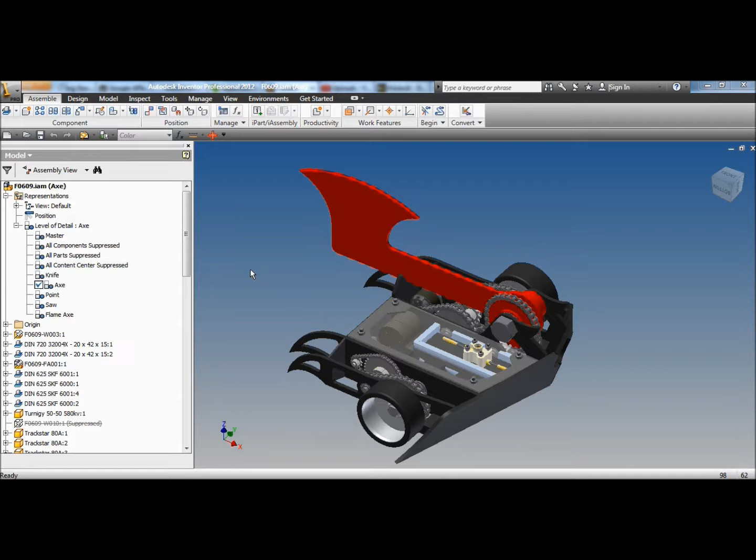I guess we'll start a new assembly. We'll put some drills in there. Where's my cordless drills kept? Yeah, there's a cordless drill. There's two cordless drills. I think we'll just do a two-wheeled robot. It's a bit simpler. We can make a four-wheeled robot later, but we'll do a two-wheeled one to begin with. We've got some cordless drills.

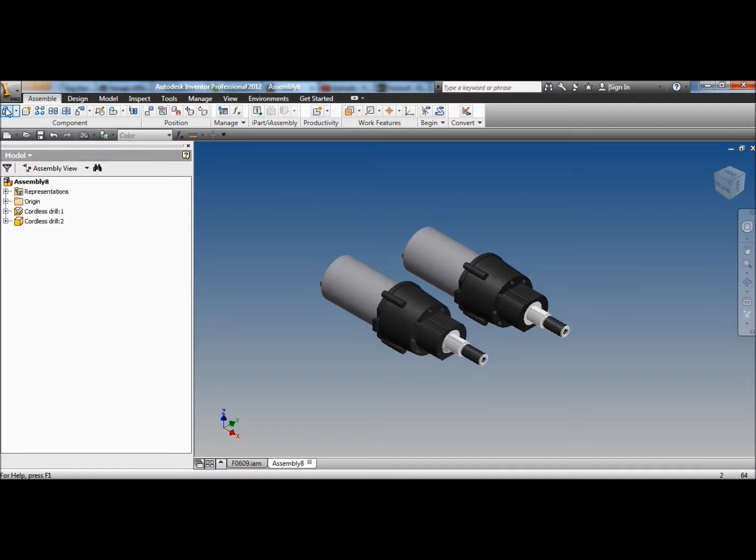We need some wheels. We have a 95mm red wheel. And these wheels were modelled in SolidWorks. They must be quite old. I haven't used SolidWorks in years.

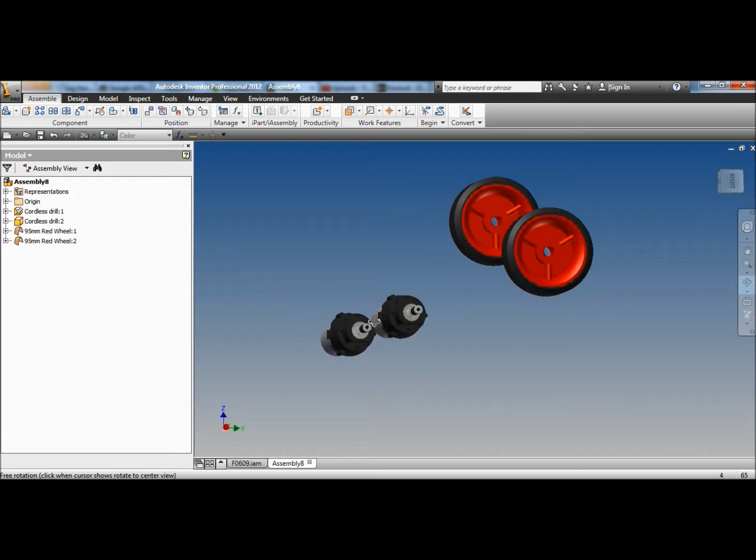Oh well, what else do we need? Battery. We need a battery. What battery should we use? Got a 4-cell lithium polymer, 2450, that one. Lithium polymer 4-cell.

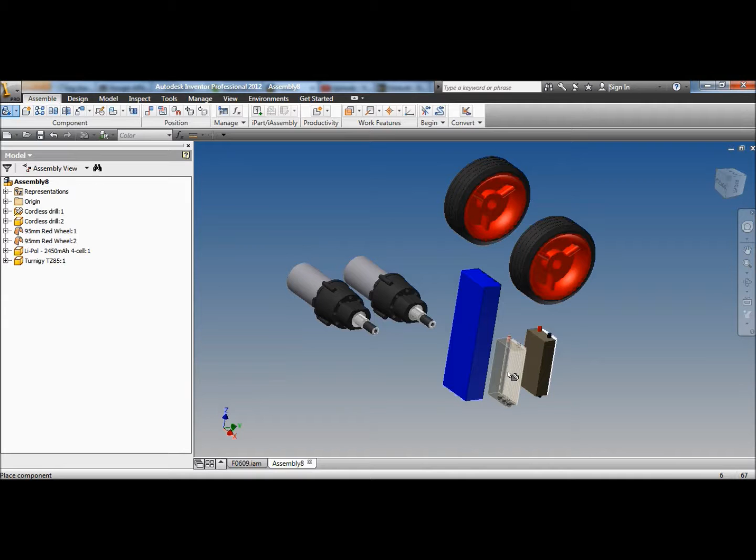Speed controllers. I think I've got some TZ85s in here somewhere. Where are they? What did I call them? TZ85. There we go. I guess we need two of those. That's what we need for a simple robot.

Now, how am I going to build it? I don't know. We will start by making a new one. I will save this. Save it. We'll make a new folder called Simple. We'll give it a part number. F1001.

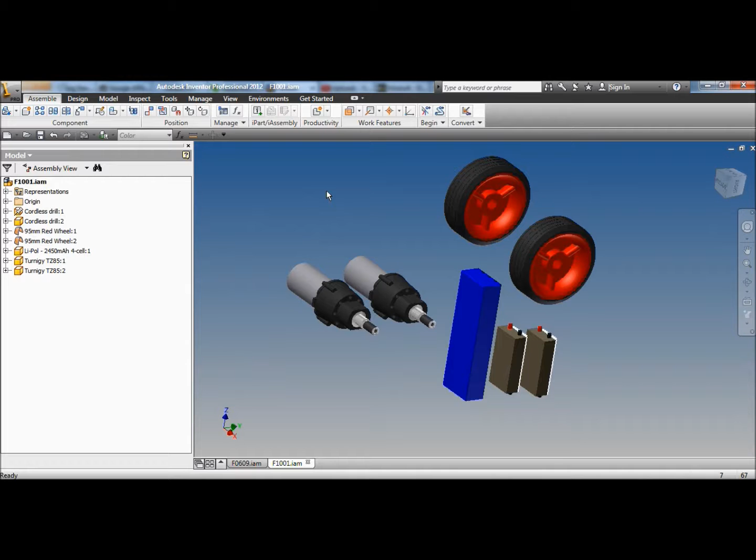Yeah, simple. And we'll build a new skeleton. First thing, I need some parameters. I'll click on parameters, or link.

Go back to the common parts folder, and we'll find cordless drill. Cordless drill, there we go. Open. I want all the dimensions, because I've got dimensions for motor length, motor diameter, gearbox length, all that sort of rubbish. Done.

Yes, that'll do for the moment. What else do I need? Now we'll just start building the sketch. We'll do it on the XY plane. And we will draw a rough outline of a motor, I guess.

So there's a motor, its gearbox, a double D on the front, there's a shaft, do one up the other side of the robot. Very, very rough.

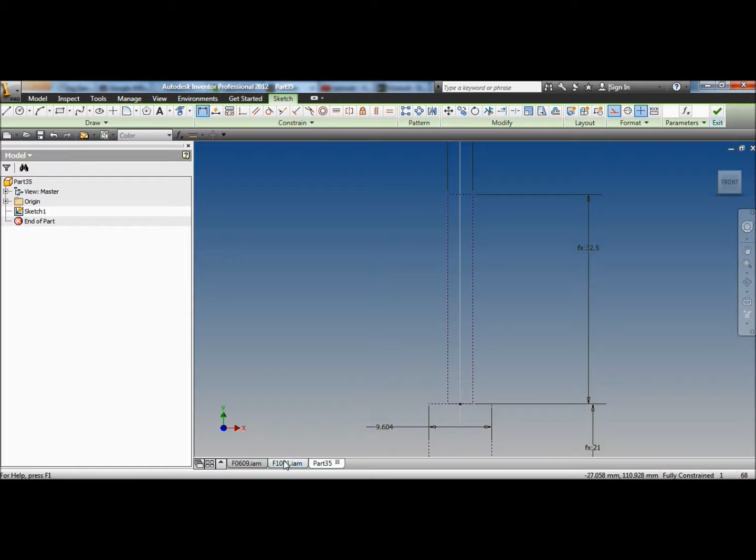We only want it to be 12.5. I'll just do 12.5. And then we have motor. Motor dia. There it is.

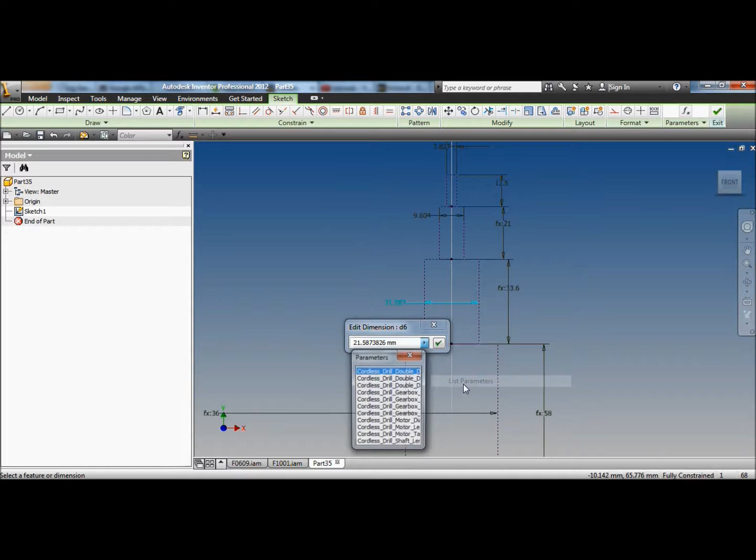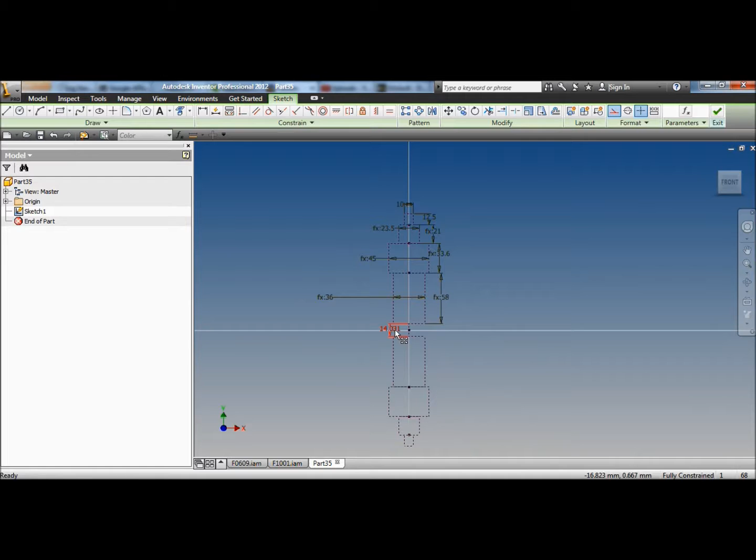This one here, this gearbox, maximum OD. This one is the double D width. And then there's a shaft width, which we'll just put in as 10. And we'll put the space in between the motors to be about 50. So let's position their motors. We'll draw some wheels.

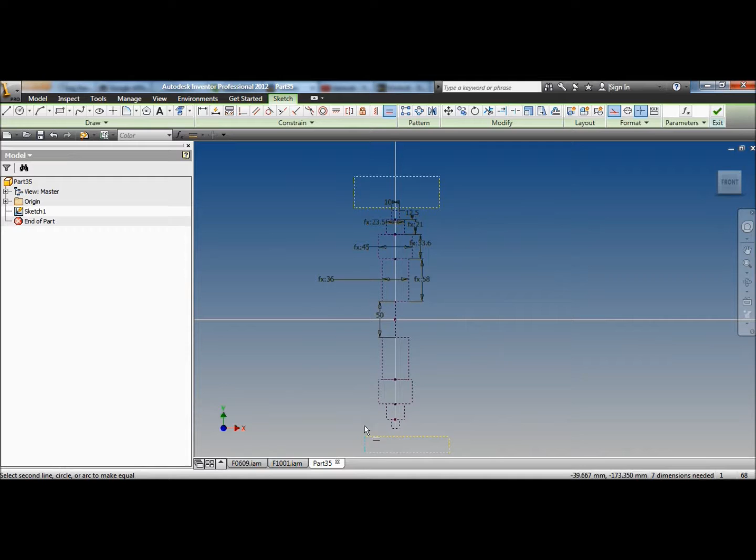Because the wheels are very old SolidWorks models, they don't have any parameters, so we can't link them into the model and make sure that they're all 100% correct.

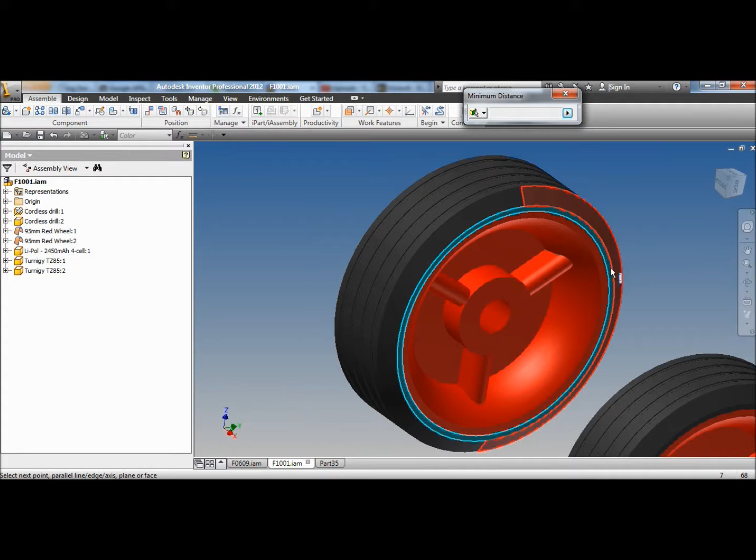So I'll just have to use plain ordinary dimensions. 95 OD, and the width is... what is the width of the red wheel? Width of the red wheel is 31.5 millimeters.

So we'll just dimension from the outside of the wheel to the outside of the other wheel, except... there we go, the robot at the moment would be 363.2 millimeters wide. That's pretty wide, I reckon. Or do I make my robots too small? No, that'll be a good dimension.

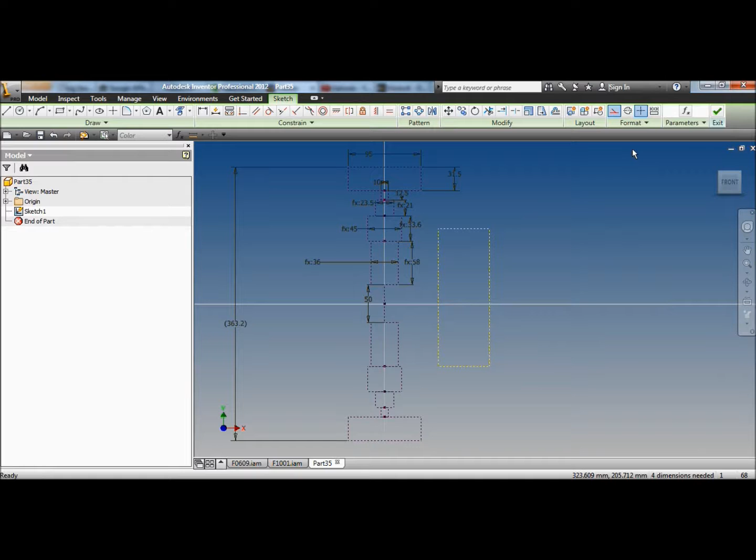Yeah, we should draw in a battery. Figure out where the battery's going to be. Put the battery at the back. How big's the battery? We need to link the parameters to the battery.

So that was a lithium polymer, 2450 milliamp hour four cell. Open user parameters. Done.

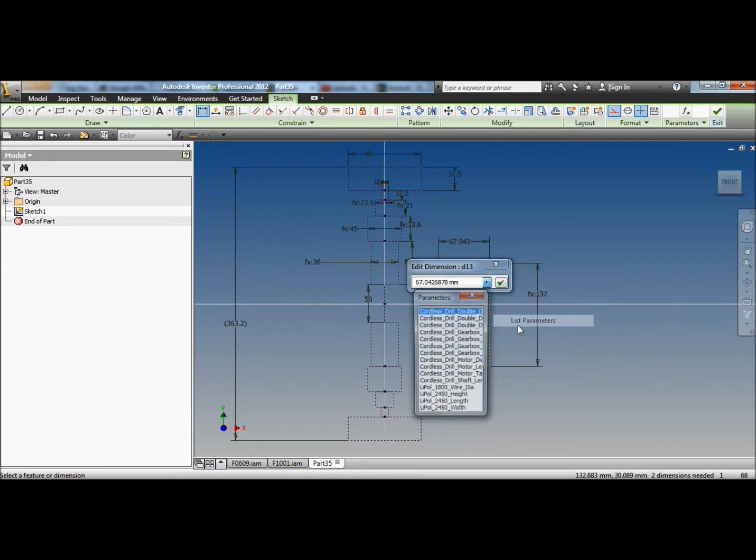Then we make the length of the battery to be that one, the length, and the width. So that's how big the battery is. It's not very big. And then look, lots of empty space.

Let's put the battery on one side and the speed controllers on the other. We'll leave lots of empty space in this robot, so we'll stick the battery in the middle, and we'll make it at 60mm from the center line of the motors.

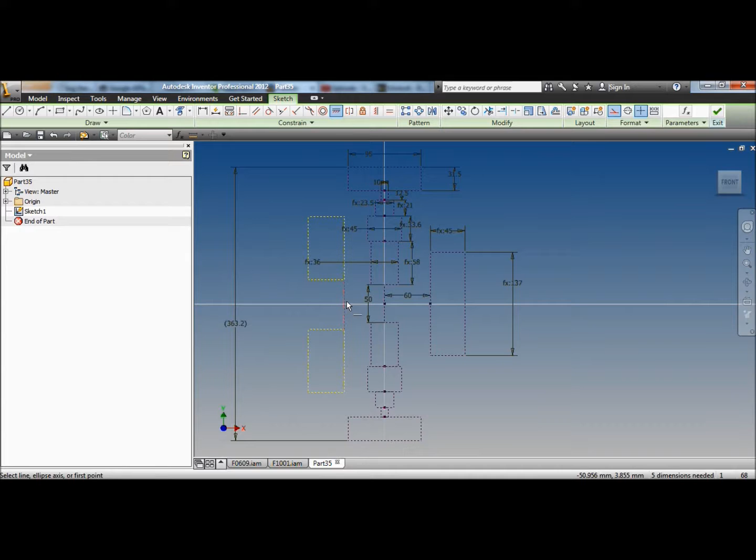Put in another two rectangles over here for the speed controllers. Equal, so equal, put in another center line here, just so they'll be spaced equally over the center of the robot.

We'll go back to parameters, hit link, and link to the model of the TZ85s, and there we go. I've got my heights, widths, lengths, everything in there. Okay, done.

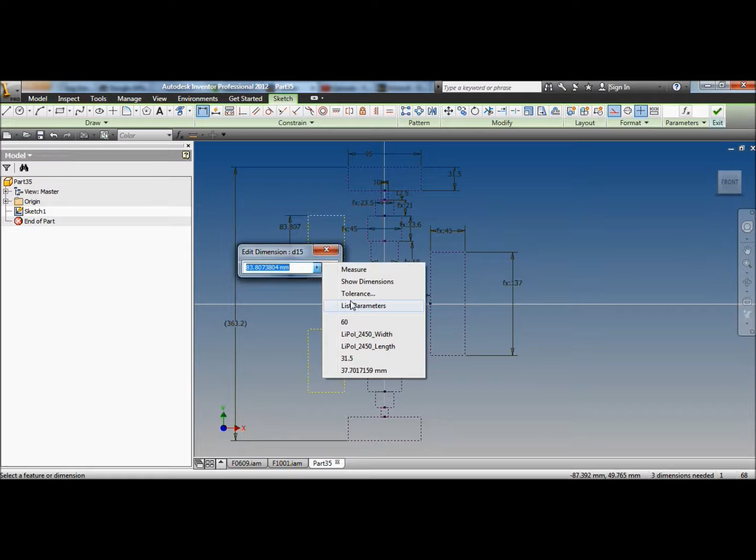Dimension those rectangles with the height and with the length and width. TZ85 length, TZ85 width. There we go.

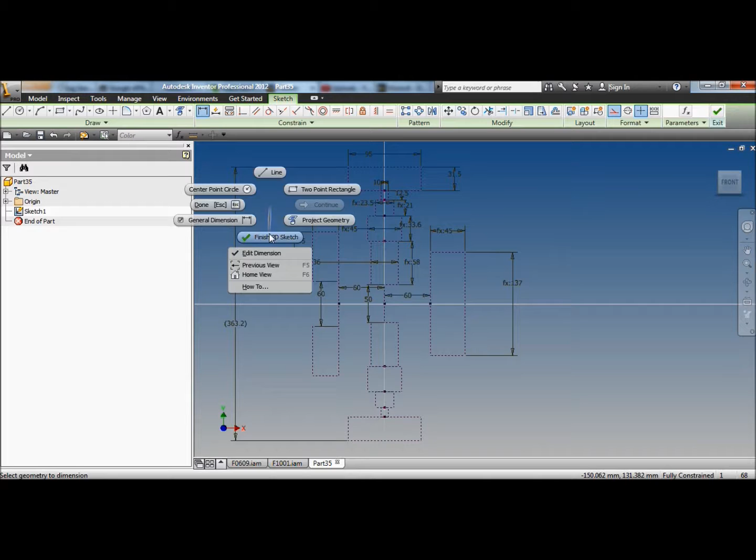We'll make these fellows 60mm apart, and we'll do them 60 from the center line as well. So that's my rough layout of the robot. And then we'll finish that sketch.

So that's what my robot might look like. Might change it. Actually, I'll rename that sketch first to be layout instead of sketch 1. Edit the sketch first.

What I might do is draw a rectangle around the whole outside of the robot as a construction line.

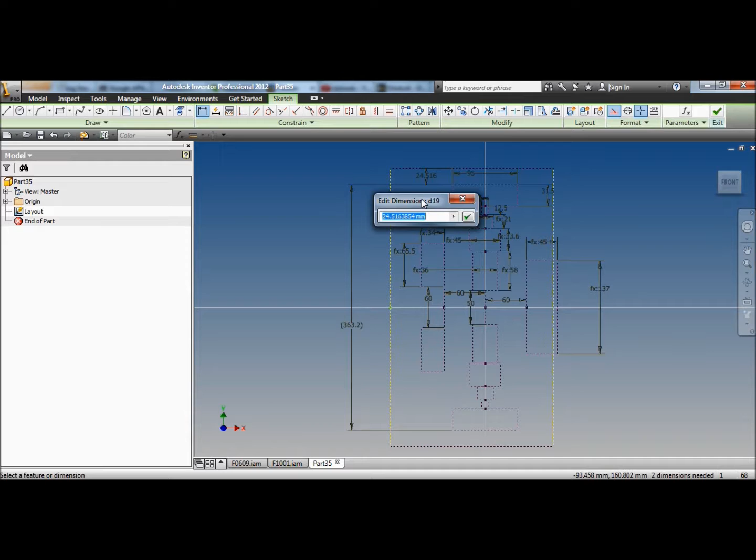First, I'll say we want how much gap between the armor and the wheels. We want lots, because this is a beginner's robot. We'll put 20mm.

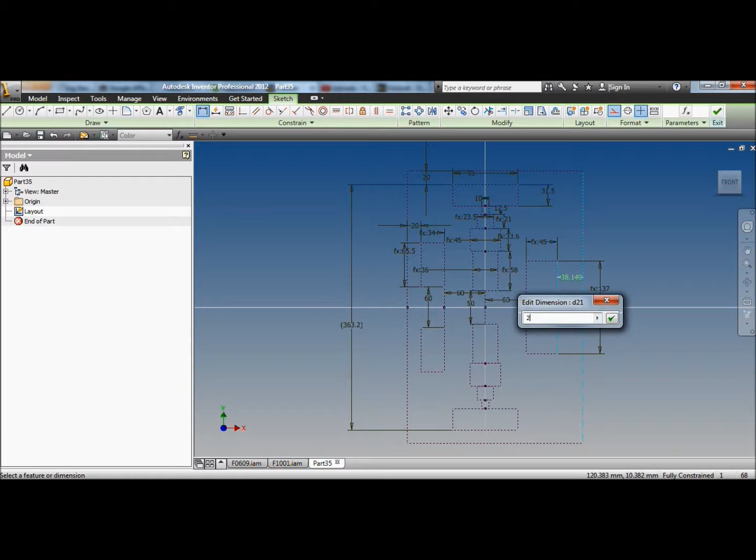And then between the speed controllers and the front, we'll put 20mm. And between the battery and the rear, we'll put 20mm. Done. Finish sketch.

So that's what the layout of my beginner's robot looks like. It's kind of boring. I don't like boring robots. What do I do next? I don't know.

Maybe I will put in a motor mount, the front of the motor mount for the drill. So I'll create a new plane, select the XZ plane, and then select a point on where the double D meets the gearbox. And that is a new plane.

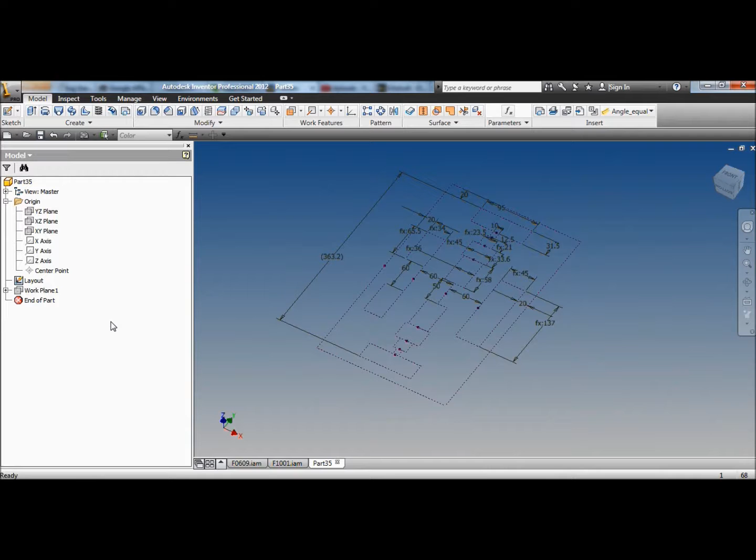Turn its visibility off, because I like to turn all my planes off because they get annoying. And I'll rename that to work plane, motor, mount, front, left. That's the left hand side of the robot.